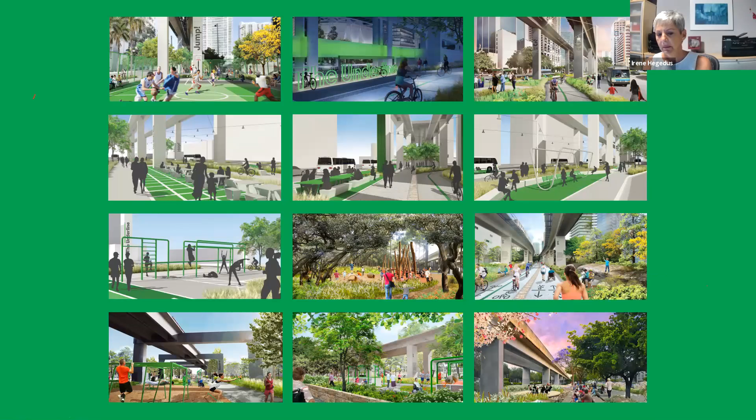In here are just some images of what you can see. A lot of them are from phase one, the basketball court, how it's going to look under the Brickell area with the bicycles, some of the equipment that are going to be incorporated for exercise. Obviously, there have been some deviations on the graphics from what you're seeing here in the slides to what actually the FHWA approved as part of the MUTCD.

One interesting part is that if you see on the bicycle path, there is a green line in the center of that. That line needed to be yellow to meet the standards, even though they don't have a standard for off-road facilities. But the Underline did not feel that they wanted to introduce a non-standard color. So the bike lanes are not going to be separated. They're not going to have that green line in the middle.

And the rest of it is anything related to bicycles and pedestrians or any kind of symbols that are placed on the pavement. They're now enclosed in a circle and they are high contrast as required by the MUTCD. The rest pretty much stays the same. We did go to commission first in February and then again in August to modify our zoning ordinances to allow for the signage on the Underline.

We first had to go to the FTA to receive approval, and then to the FDOT central office in Tallahassee, which controls the Highway Beautification Act. We fall within 660 feet of an assisted highway, a federal highway, which is US 1. With the exception of 2 blocks in the project, everything falls within that, so they needed to tell us whether our proposals were okay.

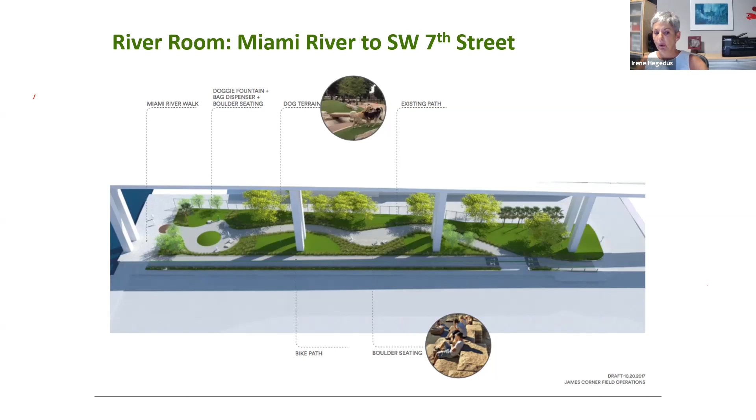Phase 2 will have three amenities. One of them will be Simpson Park, which the City of Miami always wanted something in there, and that's going to be a more active kind of park, for children. Then the other two are passive.

One of them is north of the Vizcaya station, where the pedestrian bridge over US 1 connects to Vizcaya Gardens. Vizcaya has requested some kind of connectivity and awareness on our side to try to really set a link between the two, and also try to connect to the other bike trail to the Rickenbacker. For that plaza, we had the original meeting with Vizcaya, where we walked the site.

As we move along with the design, we issue a notice to proceed, and some of the elements will start to materialize. The third plaza, also a very passive area, is going to be along 17th Avenue, south of Vizcaya Station. And that's where we are.

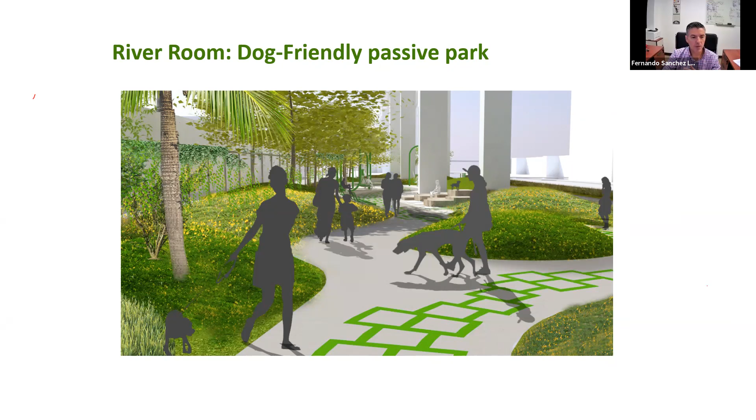Okay, great. Thank you, Irene. Really appreciate it. Is there anyone on your team that wants to say anything else, or were you just covering everything for the whole team? I believe Ken Garner is in the meeting. Yep. And Fernando, do you want to add anything? No, I would probably let Ken speak, and probably Alex.

We've been presenting to the TARC also for the Golden Glades multimodal with the same team, with AMP and Ken, as you may recall. We'll be leading our major efforts towards the landscaping in coordination with the county. So if you have any questions, Ken, maybe you can introduce the approach and criteria we're trying to achieve here, for the team to understand. Okay, thank you.

Do you have any questions for us? Yeah. Just to keep some order, so people don't jump over each other, I'm going to start and then go through our member list again, trying to keep it a little more orderly.

Just one correction on, I think, your fourth slide, the project phases slide—phase 1 ends at 13th Street, I believe, not 13th Avenue. Correct, so that's just a little correction.

You addressed in the one slide, you referred to that there are about 250,000 residents within a mile or half mile on each side of the underline. Did you all study how many employees there are? Because that could be a big number too in some of the areas.

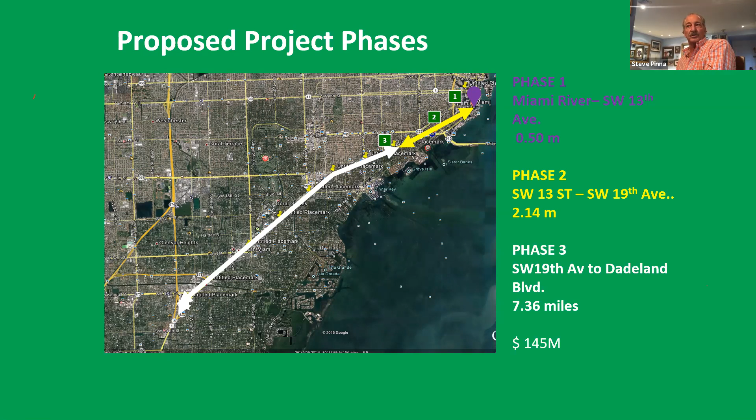At our meeting, we had a project, I believe it was for $47 million to build that. And in their presentation, which was a design build project, they knew the path was coming, and their idea was that everybody just got off their bikes and pushed it through the trail. And I believe, isn't the trail continuing afterwards down to Perrine, down that? Yes.

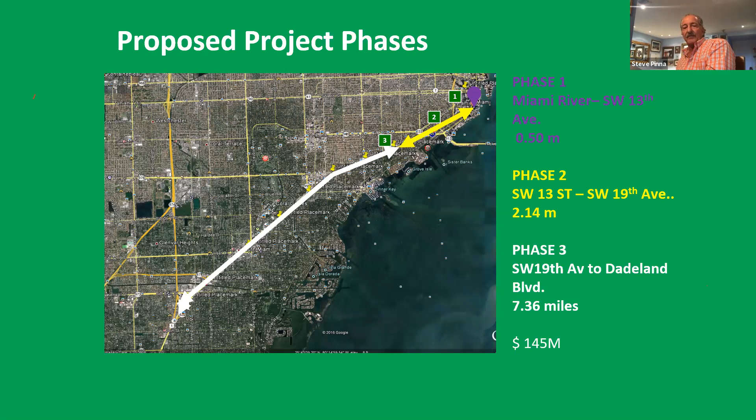Yes, they have a trail right now in place. So then this would break that, and it just seems like they should be talking to you so that whatever your standards are for having these trails go there, they should be designing their project, and it shouldn't be an afterthought. Because design can be not expensive if they plan it properly. And so we had over and over at this meeting where if the design people just put it in ahead of time, then we don't have to come back and do it later.

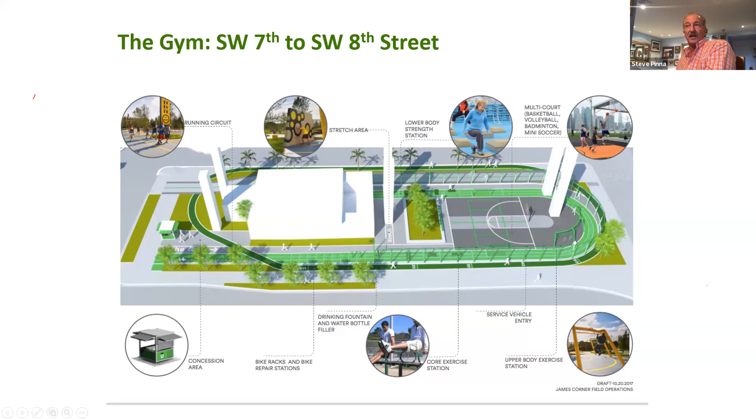So I hope they're reaching out to talk to you about this, because that was our suggestion. But the idea that we were going to just get off our bikes and walk that brand new plaza when everything else was ride just seems ludicrous to me.

I'm really excited that this has come to South Florida, and I agree. I wish we could see it faster than we are, but I'm glad to hear it's fully funded and we have an end date. So good luck. Well, we're gonna need help with procurement, because that's one of the things that is delaying us the most.

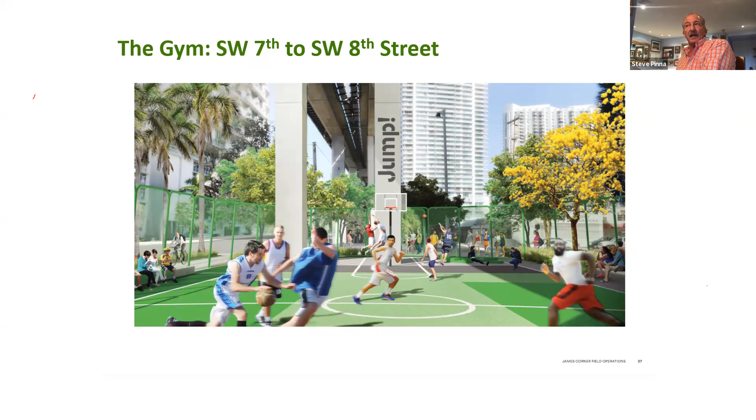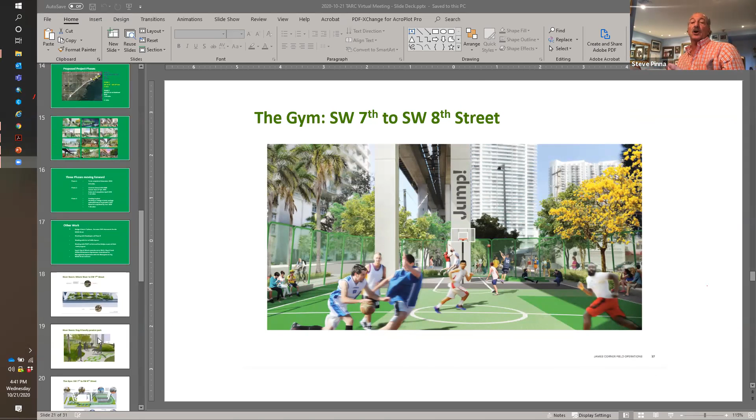And which project is this one? Do you know? This is the Dadeland South renovation, the Dadeland South Station, to allow the bus rapid transit to come into the station.

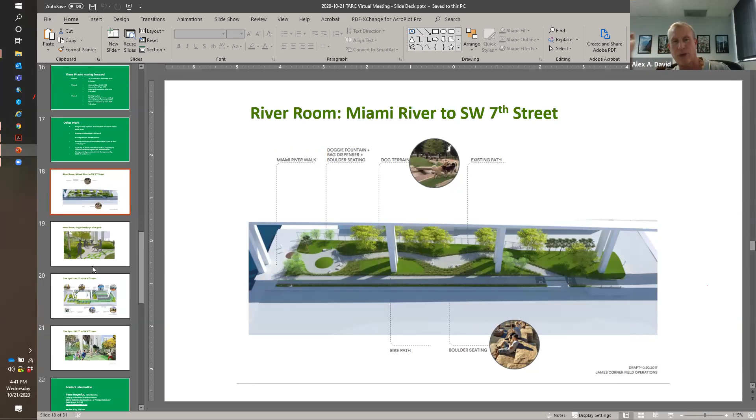So what Steve is talking about on the north side of that, we were raising concerns because it was a very narrow end to the bike, the M path down there now. And there was just no real connectivity, it seemed. Like Steve said, it was almost like you have to get off your bike and walk your bike to the south. There's one area where that happens, and we had that discussion.

It has to do with the M path coming to the kiss and ride, and what we're doing is we're gonna be taking a full set of parking there. Not only do you have the M path, but you also have parallel parking there, so we're taking that line of traffic. I asked them to please not do anything with the lighting, because if you use federal dollars to put the lighting, then I cannot touch it. So don't do it, so I can touch it with this project.

When we get to the kiss and ride, now you're at the station. That's our endpoint for the Underline. If you want to continue south, that's where we have the problem crossing Dadeland. At the very least, we worked and coordinated the crossing of that street to be straight and perpendicular to the crossing instead of diagonal, because nobody was using that. We sat there and observed people, where they're coming from and how they're crossing Dadeland.

Once from that little point, from the kiss and ride drop off across where the new elevators are going to be, and getting right up to Dadeland Boulevard, that's where you dismount the bicycles. You don't have any space at all - you have a 5-foot sidewalk, that's it. And that is going to be for bicyclists and pedestrians.

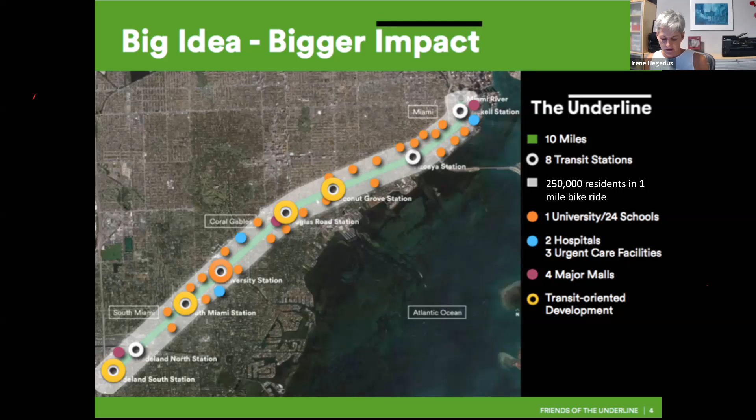The project ends right at that circle, just north of Dadeland Boulevard. North of Dadeland Boulevard, correct. Right, okay, so I'm trying to find it - because I can put it up - here it is. I think I can show you, I had Dadeland North, how convenient.

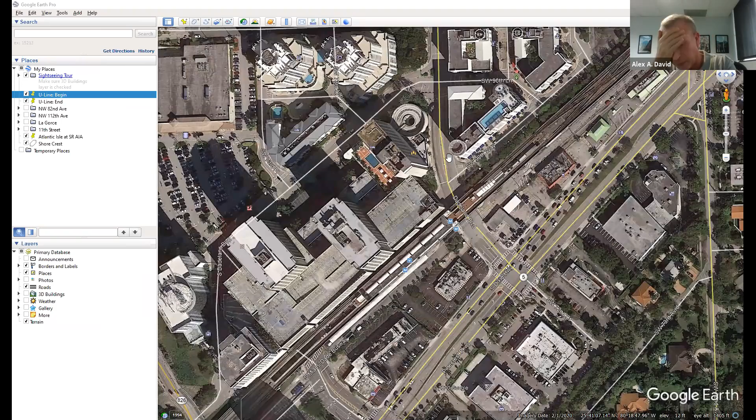I just want everyone to know exactly the endpoint, to address what Steve was talking about and what we were all concerned with at the last meeting. Let's see, can you see? Irene, I have it pulled up on the screen. That's perfect, you're the best.

So I think this is the station here. Yep, that's the station, and then north is Dadeland Boulevard, we have Dadeland Boulevard here. I'm not sure exactly where it ends, Irene, you'd have to let me know. Okay, leave it there. So you see the yellow line of Dadeland Boulevard, right? Yep, and you see that brown, that's a platform. And right, then north of that you're gonna see our canopy that steps down. Yep, okay, right there, okay, that's the endpoint. Right.

So what we did is coordinate with the designers on how the Dadeland Boulevard crossing needs to align with the area between the station and the ramp for the buses. That's where the bicycles are going to travel a straight shot through, and there's going to be a rock garden and things like that on the bottom. And then how it crosses right there at Dadeland, at Datran. So you see that little piece there - I don't know what is happening in there, but that's supposed to be the path, how it picks it up.

Now obviously that's outside the scope of the Underline, but that crossing will be improved at Datran right there, and then it will be picked up again to the trail. Okay.